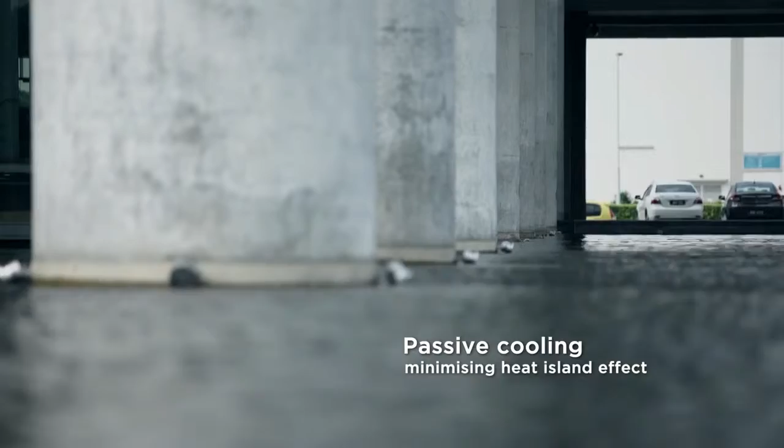From the very beginning, the philosophy that guides us in everything we do is with the sole objective of being responsible and sustainable. Everything we do is based on one thought: sustainability. For today as well as for our future generations, our children and their children, and so forth.

SP Setia Berhad Corporate headquarters is centrally located in the 240 acres Setia City Commercial Centre of Setia Alam, Shah Alam. This is the first privately owned office and listed building in Malaysia to be certified Green Building Index (GBI) Platinum, as well as Green RE Platinum.

Construction of the building took 3 years, from 18 April 2011 until 10 February 2014. In addition, a new bridge to Setia City Mall situated opposite the HQ has been built to encourage the staff to walk instead of drive.

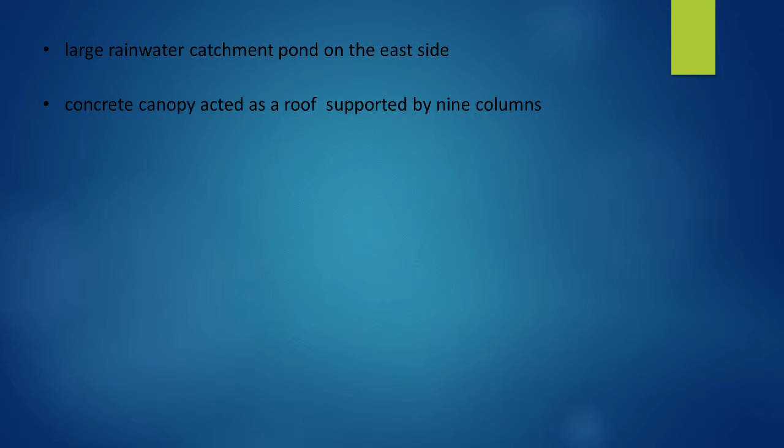The large rainwater catchment pond on the east side, concrete canopy acted as a roof supported by 9 columns. The large and shallow water body at ground level, west-facing façade was built of reinforced concrete wall with minimal opening. Flat roof where the finish is covered with turf and landscaped by means to minimize the solar heat gain into the building. And lastly is glazing curtain wall for optimal daylight penetration with minimal solar heat gain and glare.

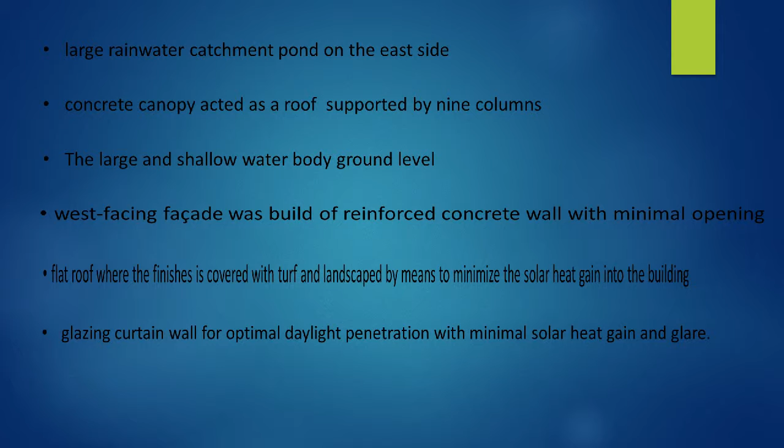The large rainwater catchment pond.

This project is equipped with many green building features. One of the green building features for this project is motion sensor for lighting. The motion sensors are installed at non-essential or less frequented spaces such as filing rooms, pantries, corridors, stores, and meeting rooms. Estimated 3% energy saving for lighting involved for this project.

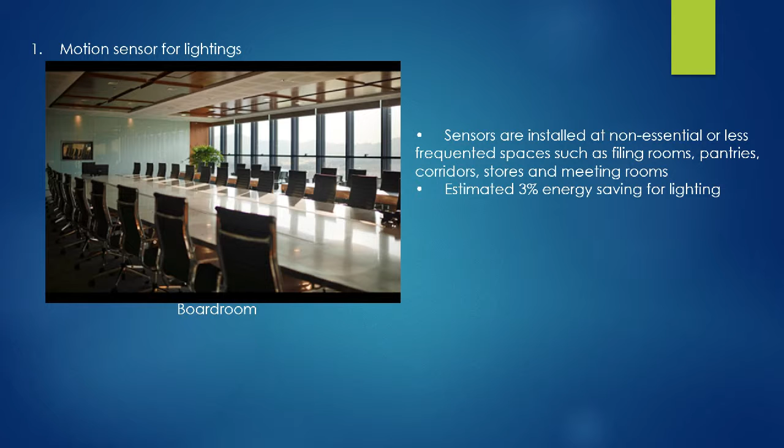Number 2 is lighting zoning and switching strategy. All individually switched lighting zones are less than 100 meter square. Essential for individual or smaller staff group where lighting for localized work zone is required. The image shown is open plan office.

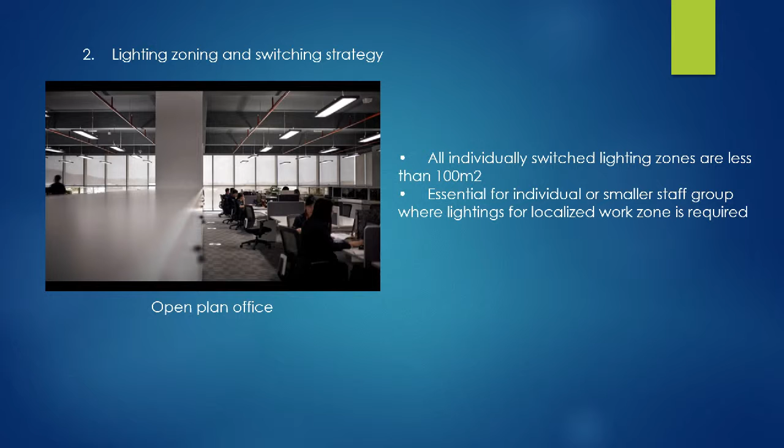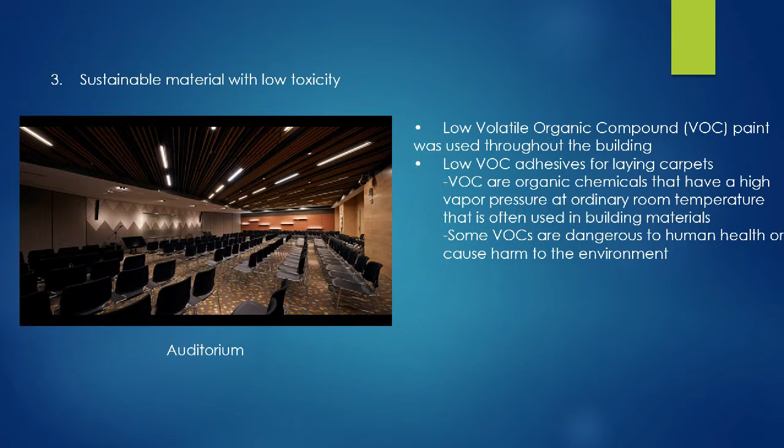This building also uses sustainable material with low toxicity. Low volatile organic compounds (VOC) paint was used throughout the building. It also used low VOC adhesives for laying carpet. VOC are organic chemicals that have high vapor pressure at ordinary room temperature that is often used in building materials. Some VOC are dangerous to human health or cause harm to the environment.

Number 4 is sun shading and photocell. Perforated blind to reduce glare while allowing natural daylight to filter through. Photocell sensors are installed in day-lit areas at the building perimeter to switch off artificial lighting when there is sufficient natural daylight, to reduce energy usage, for instance artificial lighting, and harvest natural daylight. The image shown is at meeting area.

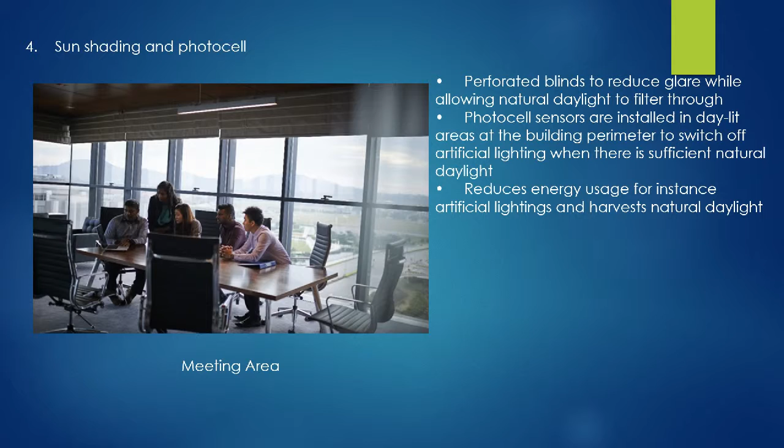Number 4 is sun shading and photocell. Another green feature of this building is high frequency ballast T5 fluorescent and LED lighting. The energy efficient lightings are used throughout the building. Another feature used for this building is high frequency ballast T5 fluorescent and LED lighting. The energy efficient lightings are used throughout the building. The total power consumption using energy efficient lighting is

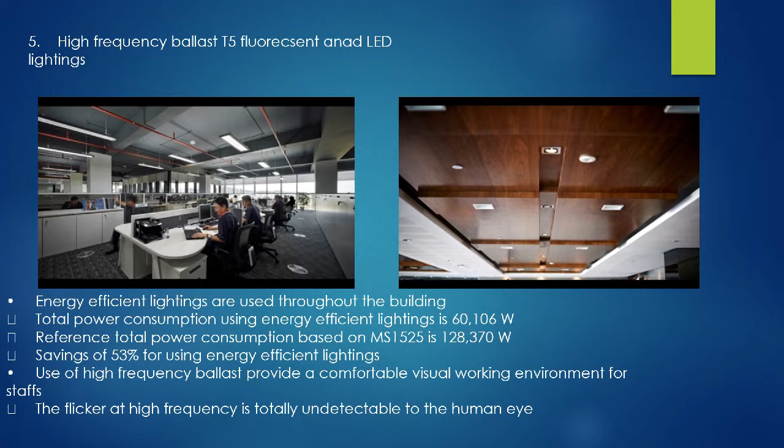Number 6 is energy efficient Kone standby mode. Light, signalization and ventilation can consume a considerable amount of energy even when the elevator is not moving. In standby mode, the car light is turned off, the power stage of the drive is set to sleep mode, and signalization displays are dimmed while the car fan turns off when not in use. The image shown is at the lift lobby.

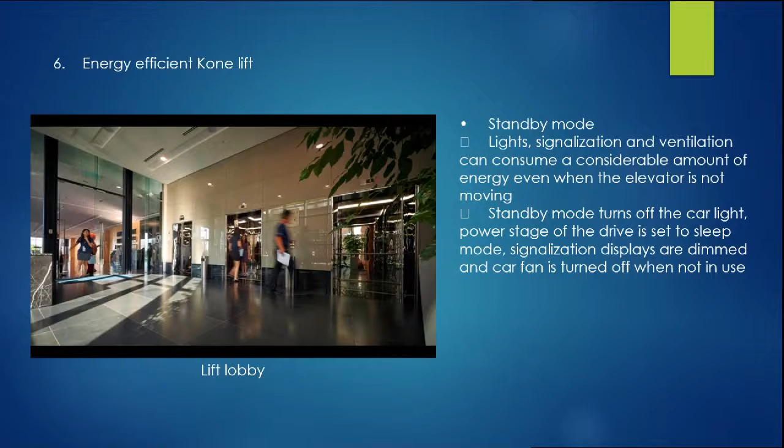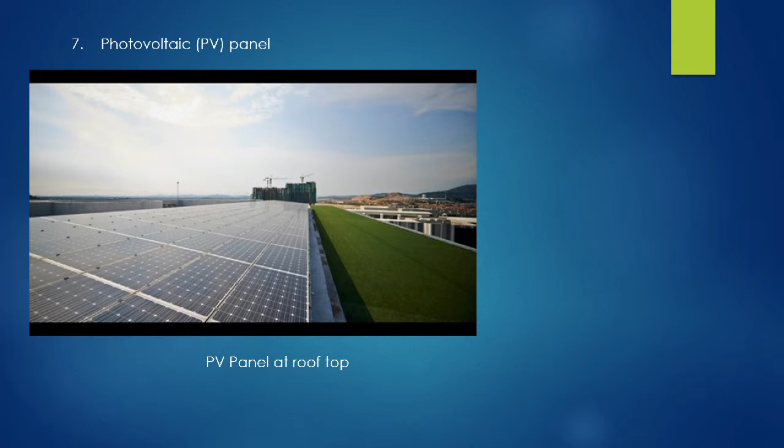Another green feature for this building is photovoltaic PV panels. The renewable energy generated through 55 kilowatt PV panels makes up to 2% of total energy consumption, which scores maximum point for the renewable energy category under the GBI rating system.

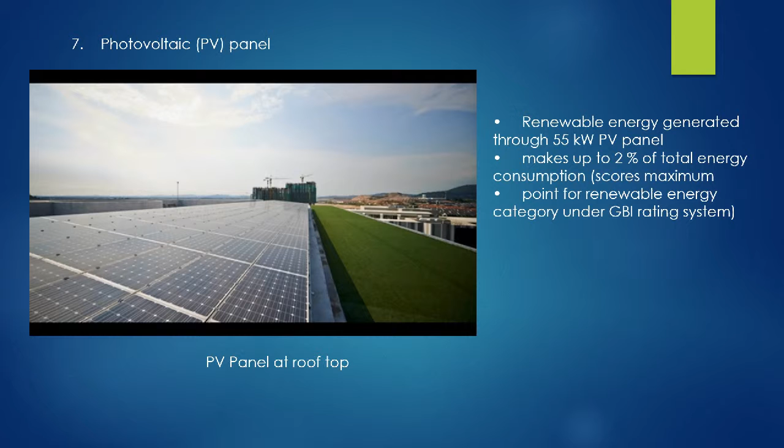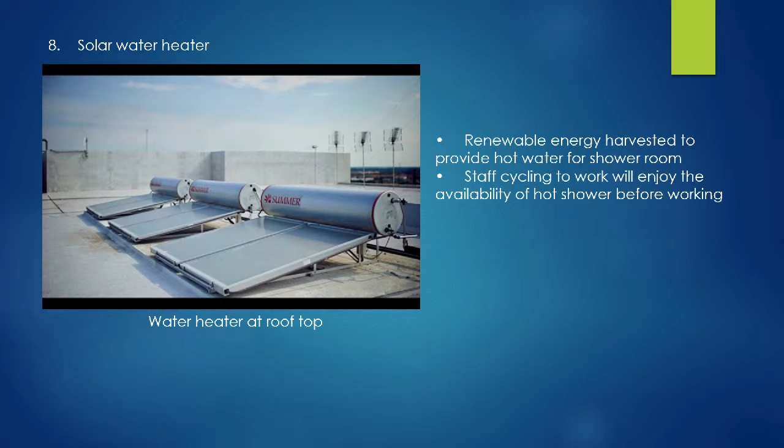Another green feature for this building, number 8, is the solar water heater. Renewable energy is harvested to provide hot water for the shower room. Staff cycling to work will enjoy the availability of a hot shower before working. The image shown is the water heater at the rooftop. Next, the building also uses water efficient taps, water closets and urinals.

The use of low flow fittings cuts water consumption by 50% compared to conventional fittings. The fittings are certified by the Water Efficiency Labelling Scheme, WELS, and rated from excellent to very good rating.

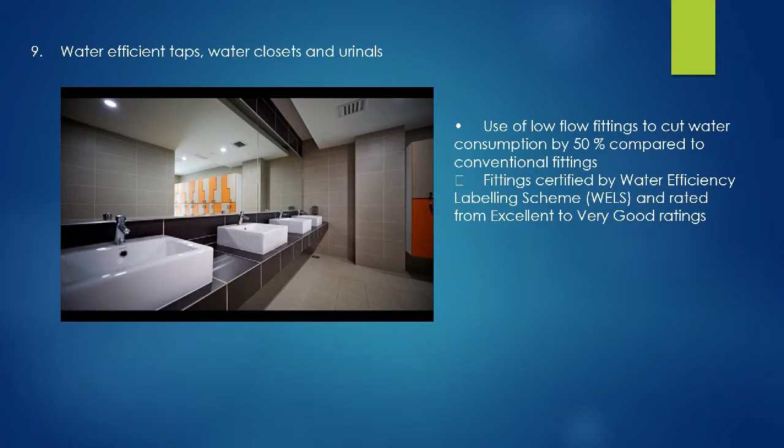Number 10 is the rainwater harvesting tank with submeter. Harvested rainwater is used for toilet flushing, landscape irrigation and to replenish the water in the water features. An average of 856 metric cubes of rainwater is harvested monthly, achieving more than 30% reduction in potable water consumption, which scores maximum point for rainwater harvesting under the GBI rating system.

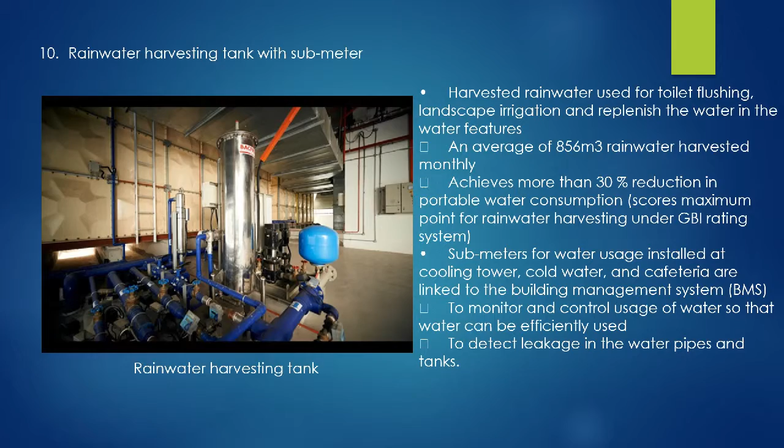The submeters for water usage installed at the cooling tower, cold water and cafeteria are linked to the building management system, BMS, to monitor and control water usage so it can be efficiently used, and also to detect leakage in the water pipes and tanks. The image shown is a rainwater harvesting tank.

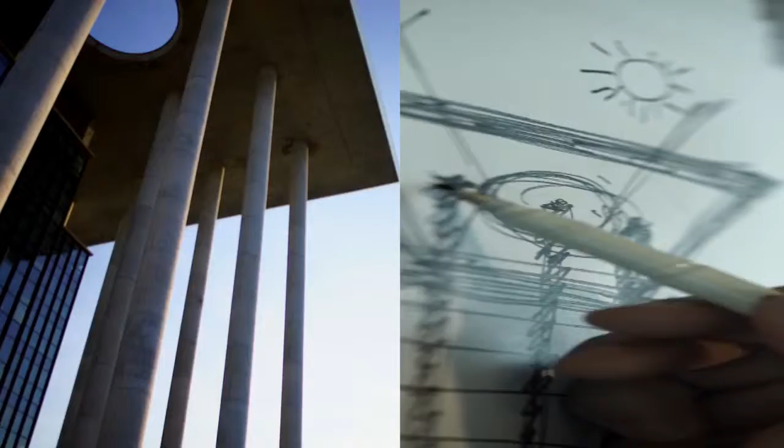Taking an example from the mangrove tree and how it sits very well with the environment and supports an ecosystem below it, we translated that into the building design, so it was not just green, but can support and stand against climate change.

Everyone who works in or visits the building is sheltered by this large canopy roof. This supports a creative and energetic ecosystem that lives, learns, works, and plays. Our designs work with nature rather than against it, so that we do not rob future generations of their quality of life.

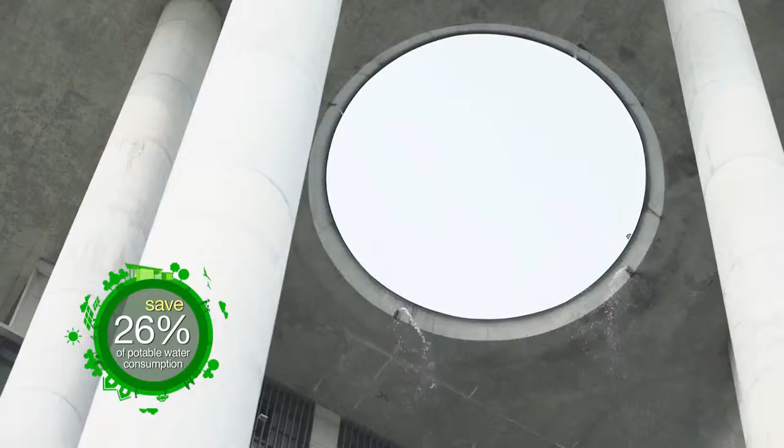We are very proud to say that this is Malaysia's first building to receive the GBI Platinum rating. It's internationally benchmarked, and we included within the building everything you could think of to make it one of the most energy efficient and green buildings in Malaysia.

We encourage our staff to help us in this vision to reduce pollution by supporting them with healthy alternatives, and ample covered walkways to encourage a healthier lifestyle.

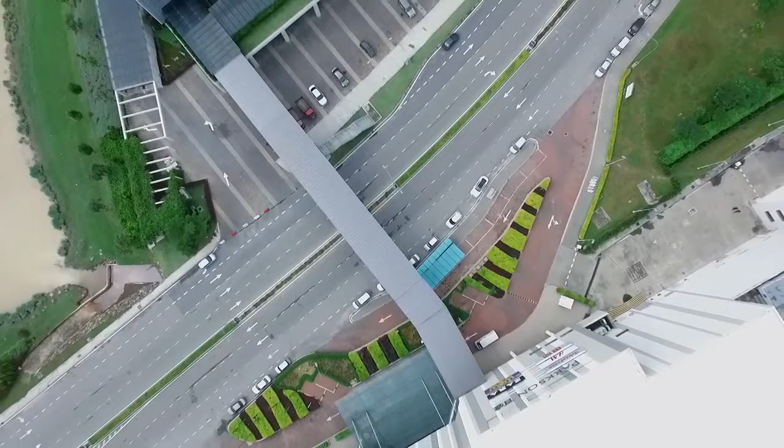I think work environment is very important. I feel so much happier, and when I'm happy, I'm more productive.

We design the surrounding environment to encourage community spirit.

Overall, for this building, the investment in renewable energy was 494,500 ringgit. It saved about RM31,264 per year, with a return on investment in 16 years. 689,500 ringgit was invested in rainwater harvesting, resulting in annual savings of 14,440 ringgit, with a return on investment in 48 years.

The total gross development cost amounted to 104.28 million, or equal to RM7,171.85 per square meter. The total operational cost of the building is 249,600 ringgit per month.

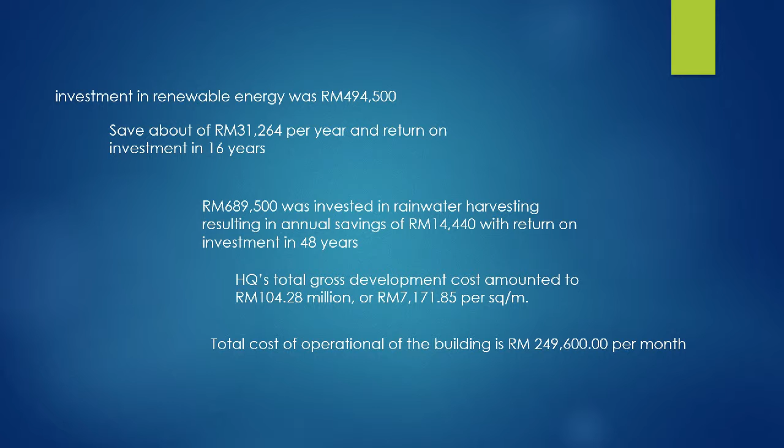QS roles during the contract: firstly, preliminary costing price, then costing during the design stage, next procurement and price, after that selection of contractor, then the final consideration which is tender and bill of quantities, and lastly negotiation.

QS role during the post-contract stage: firstly, QS will involve with the following work. Next, they will settle all of the contractor claims and prepare the financial statement. They will also be responsible for preparing the final account, making application to the architect or engineer for variation order, and preparation of the quantities.

Apart from that, during the construction stage, they will do the cost planning. They will also be responsible for comparison of cost, document preparation involving subcontractors and meeting reports, and they will also do the interim valuation, payment, and negotiation.